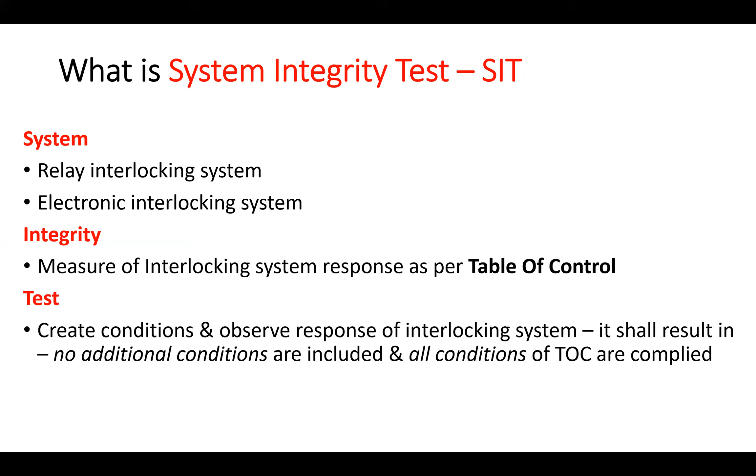Test: conditions are created and the response of the interlocking system is observed. And naturally, it is supposed to result in no additional conditions being included, what are not provided in table of control, because that reduces the flexibility sometimes, or maybe it is not advisable. And all conditions of table of control are complied, because the second one can lead to unsafe side situations and causing accidents.

So let us look at the interlocking principles. We all know from the basics that the track is divided into stations and block sections, and signals were required to give entry into the block section and into the station section. And further, because the braking distance of the train is more, a warning signal is required, what we call a distant signal behind the home. And to protect the points within the station, we require starter signals. So basically distant, home, starter, and advanced starter.

In bigger yards, we may have interstarter signals and inner homes, and more than one home signal, more than one starter signal also can be there. So signaling elements, when we look at it: point, signal, train detection devices, and level crossing gates. Route - can it be a signaling element? Maybe sometimes when we try to look at it as an element, we try to physically identify it. Route is not a physically identifiable single entity. That is why it can be an element or not an element, but we'll have a look at it. Mostly we will be dealing with the route in this session.

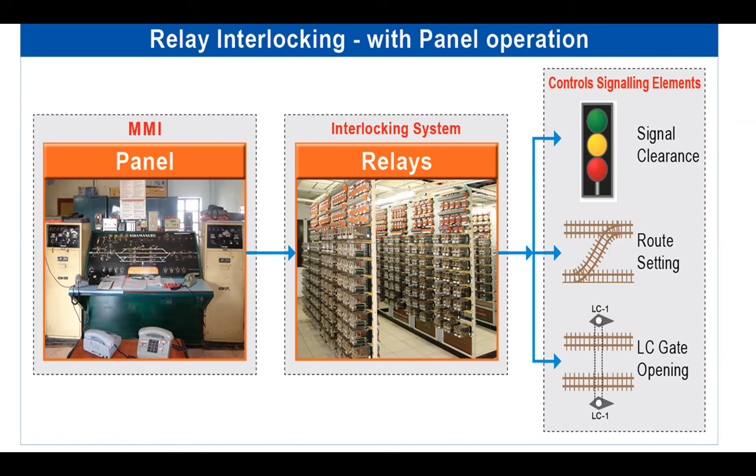So relay interlocking with panel operation, which was the very common thing on Indian Railways, looks like this. We have a man-machine interface, which is the station master's panel. He tries to alter the states of the signal, point - which is a route setting process - and level crossing gate. And in that process, he requests the change to the interlocking system. And the interlocking system, which is hardwired in the form of relays, evaluates the safety, and if it is safe, it allows the change of state and then gives the status back to the station master. This is the basic interlocking system's functionality.

Now components - if we look at how it happens, at the panel we have switches and LED indications for the statuses, and there is a cable connecting to the relays in the interlocking system. These cables are terminated at the panel termination rack, and then the relays require a power supply system of course. And then the signaling elements are connected through outdoor underground cables, through the cable termination rack. So the interlocking system interface can be at the panel termination rack for operations, and cable termination rack for the outdoor signaling elements.

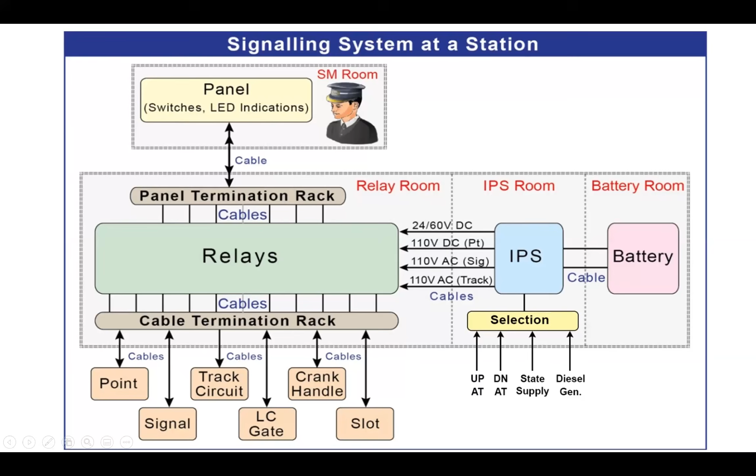Those people who understand interlocking and have some knowledge of signaling can easily understand this diagram. So the relays, which are supposed to deliver the interlocking, we can say there are three types: some input relays, output relays, and in between we have interlocking relays. And the signaling elements' status is given as input relays, like track circuit TPR, crank handle CHPR, slot from the other cabin.

other agency YR, then level crossing gate LCPR, point status NWKR, RWKR, signal lamp status - red lamp, yellow, green, route, double yellow. Similarly, at the panel interface, it takes the contacts from these relays to display the status of the signaling elements, including the route. And then the commands are given through the signal and point controlling relays. Other cancellation and miscellaneous relays are there and not mentioned here.

Interlocking relays are like route checking, route locking, route release, level crossing, and crank handle controlling and point controlling relays. And output relays are those which power the signaling element, like NWR and RWR. They power the point machine, which is operating the point. And signal lamps are lit through the contacts of HR, HHR, DR, UGR. Similarly, level crossing gate opening permission is given by LCYR. Crank handle releasing, taking out is given by crank handle YR. Similarly, permission to the other cabin is given through a relay YR.

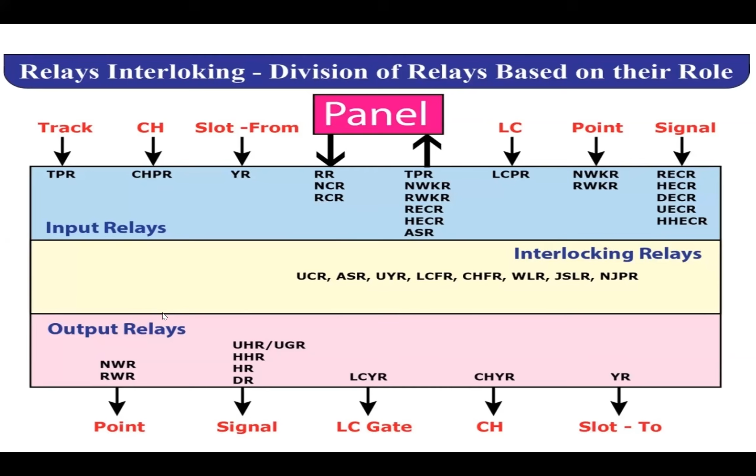This is followed on Southern and South Central, where the point machines are powered. Power is switched at the location box very near to the point machine. Most of Indian railways directly operate from the central place.

Similarly for signal also, we have a route - the RR relay, which is the first relay to ask for the clearance of the signal. Then route checking, route locking is done, and then we have the yellow lamp control relay. So the yellow lamp is lit through the 110 volt AC supply through the HR contact.

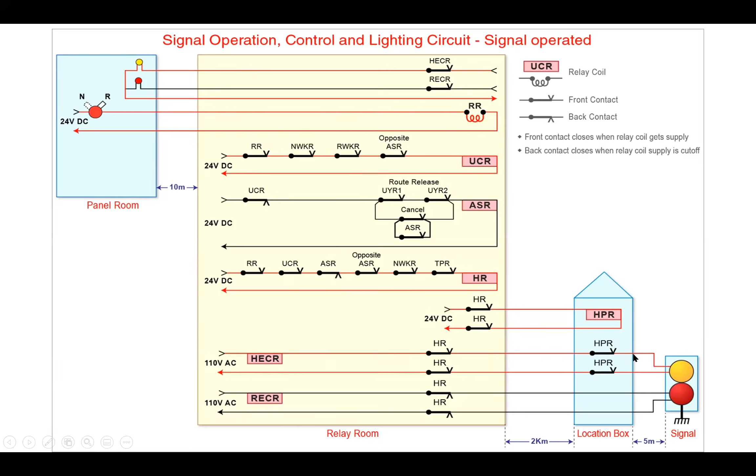Now let us look at the point. A point is a movable signaling element. So anything movable, if it is not properly moved, it can cause an accident - it is a big hazard. So the point becomes the central element in the interlocking system.

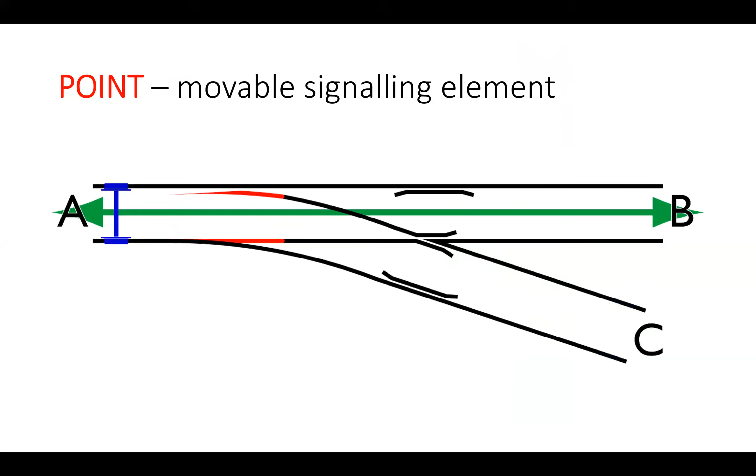Let us have a look at this station. It is a 5-road station with 3 passenger carrying lines and 2 goods lines. We can say this is a crossover, this is the trap point, and this is a single end point. In a crossover, the status of both end points together is considered for providing the status of the crossover for signaling purpose. If one end is okay and one end is not okay, it is treated as a failure.

For a single end point, isolation is not required. That is why a single end point is provided connecting both the goods lines. The outermost point in the yard is called the top point. From there, the counting starts for providing the signals, either advanced starter, the home signal, or a distant signal.

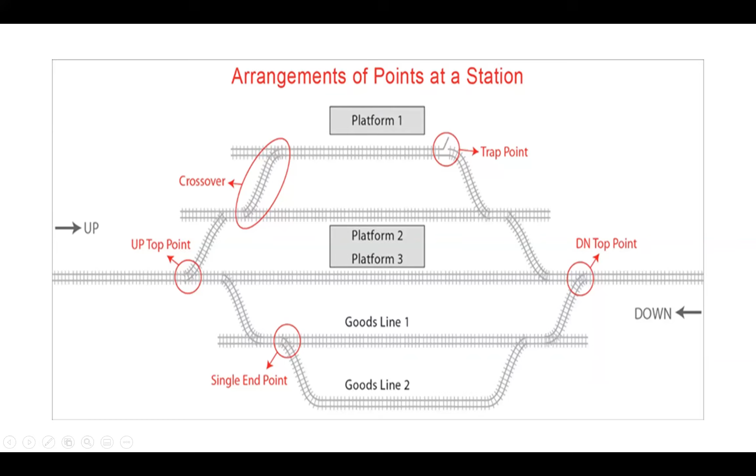Signals provide movement authority, and everybody knows red means stop. There are 2 types of signals: main signals, one based on operations - manual signals, and other types are automatic signals. Let us look at manual signals first.

The stop signal is the main signal we are talking about, not shunt and other auxiliary signals. Red means stop, yellow means be prepared to stop at the next signal. Double yellow means the next signal is already cleared, but you have to pass that signal at a restricted speed. Normally it is provided for distant signals, but where combinations of signals arise, any signal can have 2 yellow lamps. Of course loop line starters will not have this. Green means proceed at full speed.

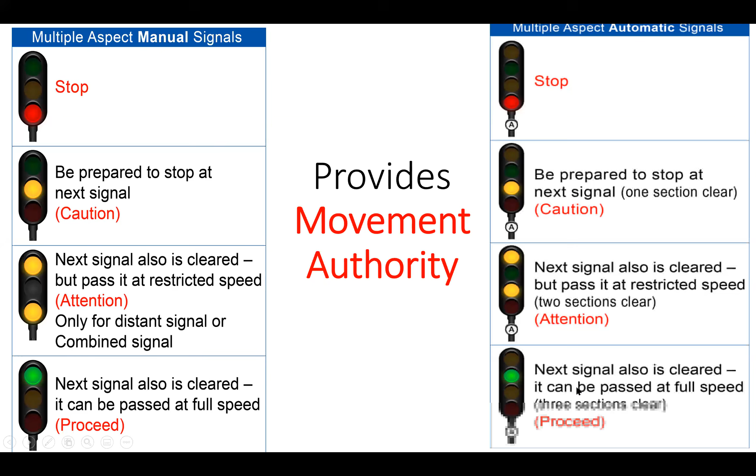Coming to automatic signaling, it's a very clear-cut thing - each aspect says how many sections are clear. This presumption is if the inter-signal distance is more than the braking distance. If it is less than that, the aspect is repeated. So yellow means 1 section is clear, double yellow means 2 sections are clear, green means 3 or more. It is something like this in automatic signaling.

So if there is a train here, the train is protected by the red lamp of this signal, and then we can see yellow, double yellow and green. Further signals behind the green are also going to have green.

A typical 2-road station where manually operated signals are provided on the single line - you can see the distant signal, home signal, and then the opposite advanced starter signal. The track is divided into sections for monitoring purposes.

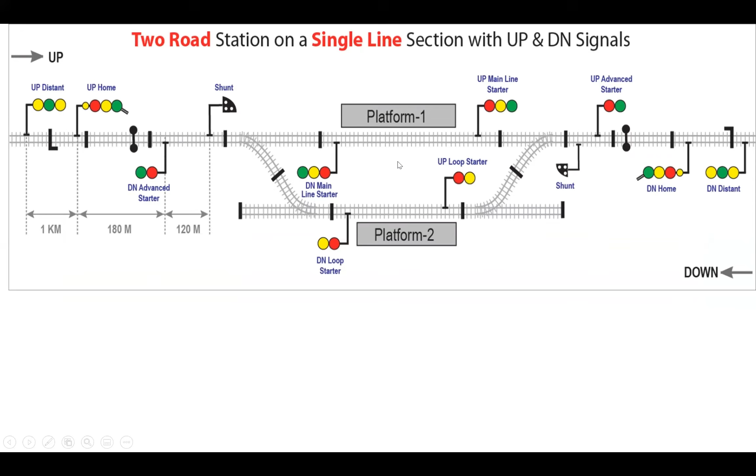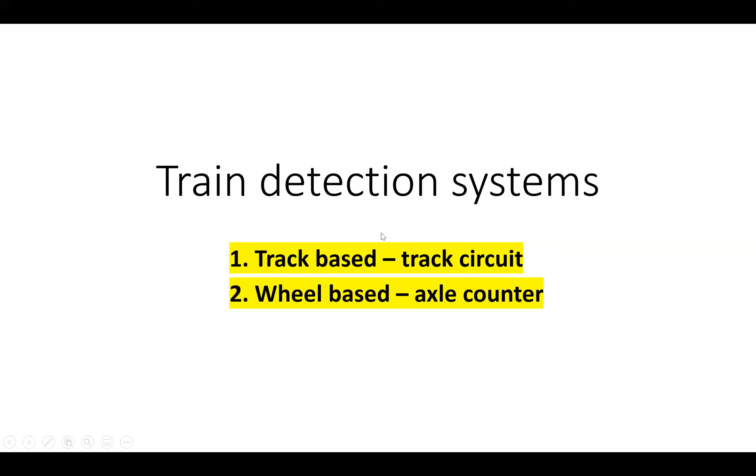Train detection systems - there are 2 types as we know. One is track-based, that is track circuit, powering up the rails with power supply and then detecting it on the other end. This is the DC track circuit, simple. The other one is wheel-based.

The wheel based system doesn't mean the wheel is detected directly - it's through the interference it causes to the magnetic flux of the sensors fixed to the rails. We have two types: analog axle counter and digital axle counter. Mostly nowadays, digital axle counters are being used.

For interlocking purposes, the complexity of train detection doesn't really matter, because we use only one relay ultimately to see whether a section is clear or not. Whether it is a DC track circuit, AFTC, or axle counter - digital or analog - it doesn't matter.

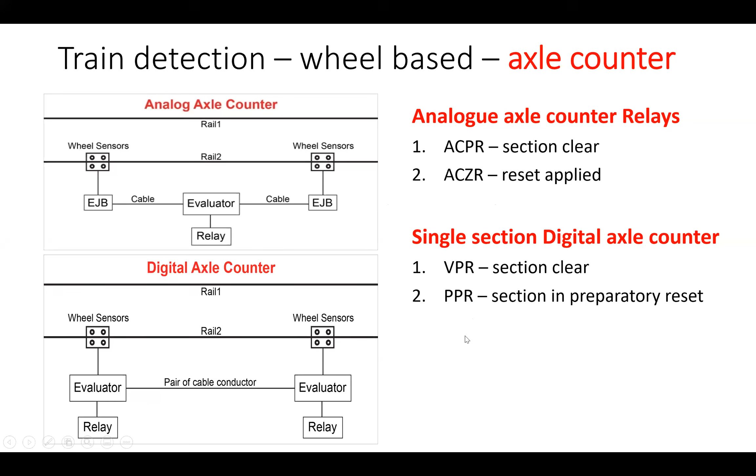So when the gate is closed, a key comes out, and that key, when it is inserted into an EKT, gets locked and it picks up a relay. That particular relay, LXR, is repeated to the station, and LXCR. This LXCR is used for the interlocking purpose.

After the train passes the level crossing gate, the station master operates the gate control switch. If the gate is free, a relay LXYR operates, and this LXYR relay is repeated to the station and to the level crossing gate. And at the level crossing gate, another relay picks up, which covers the coil to release the key to open the gate.

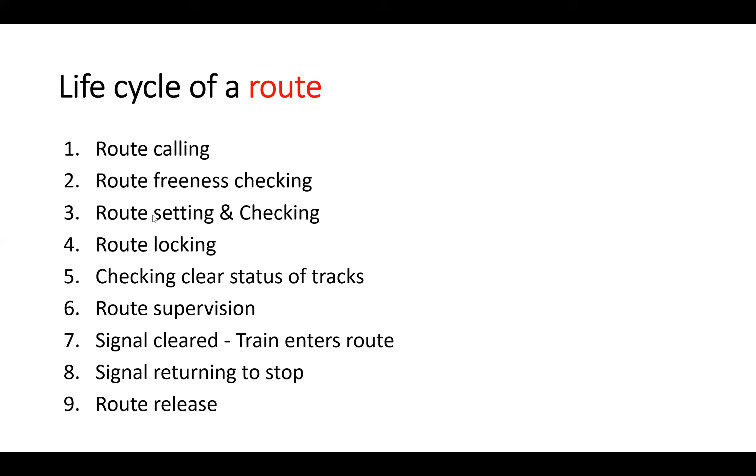Then the next one is signal is cleared, train enters the route, and then signal returns to stop, because as the train enters the section, and then when the train reaches the destination track, the route is released. These are the 8-9 activities that takes place during the life cycle of a route.

Route locking can be reversible and irreversible. Both stages are there. So what is reversible route locking and what is irreversible route locking? In reversible route locking, the signal, when normalized, route gets released. In irreversible, it won't. That also we will see a little later.

Why are we locking the route? There are two basic reasons. So, locking between the conflicting routes, that is, it won't allow the conflicting route to be used for sending a second train. That's why we lock the routes.

The other one is, until the movement is completed, the signaling elements, level crossing gates, movable bridges if there are any, or the points, they are kept intact. Otherwise, there can be danger at the level crossing gate to the road users, or the train itself may derail over the points if the point is disturbed when the train is running.

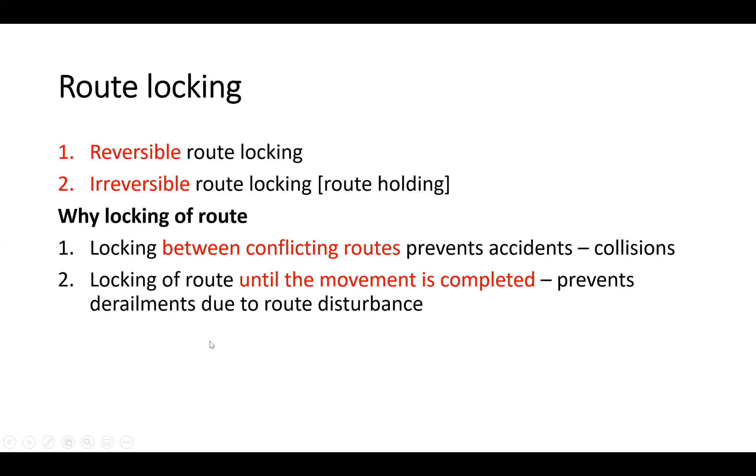Irreversible locking happens after signal opening, signal clearance. Actually this is what is happening in our case. So first default position is no route is locked. Then first stage is route calling and checking. Second stage is commanding of the elements, that is points. Third one is signal opening with reversible locking. That means signal gets cleared, and if the signal switch is normalized, the locking gets unlocked.

Next stage is irreversible locking, which we call approach locking. Then train enters the section, then signal goes back to danger. Seventh one is train clears the route. Even partially also we can release the routes. Then the route release takes place.

So at any stage, route calling stage, or commanding of element stage, or before signal opening, or signal reversible locking stage, we can go back to the default position of route not locked. You can see these three arrows. In all these three stages, we are permitted to release the route without making use of the route.

This is irreversible locking before signal opening. This happens in Siemens design. When once we clear the signal, and if we put back the signal, and when GSLR drops, it is not possible to again operate the signal. We have to again cancel it and then re-clear the signal. Maybe because the status of the buttons used normally in Siemens practice doesn't say anything about the operation. The operation is a momentary thing which gets recorded. That is why irreversible locking is provided before signal opening.

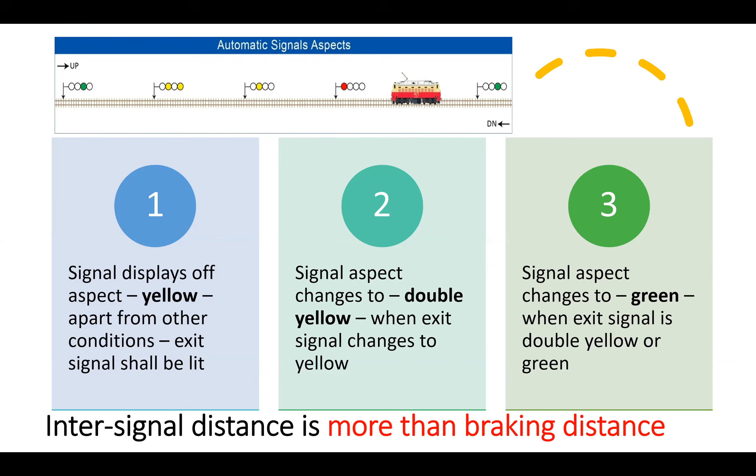A signal displays single yellow, apart from proving other conditions, when the exit signal is red. Exit signal shall have a light, otherwise the driver doesn't know where to stop. Signal aspect changes to double yellow when exit signal changes to yellow. Similarly, the same signal aspect changes to green when the exit signal is double yellow or green. This is the sequencing that happens.

If we apply this to standard manual signals, you can see the up advanced starter and up mainline starter number 2, up home signal and up distant signal. Let us observe how their aspects are controlled. The green aspect of the advanced starter controls the green aspect of the mainline starter. Similarly, the red aspect of the advanced starter controls the yellow aspect of the mainline starter. If the red lamp fuses, if that advanced starter is blank, the mainline starter signal cannot assume yellow aspect. This is red lamp protection. The same thing is applied for the home signal also.

The green lamp can be lit only when the mainline starter is green. Similarly, the yellow lamp can be lit only when the mainline starter is yellow or red, one of them, meaning the signal has to be lit. So when it is set to the route, that route lamp also is lit, that is for the loop line reception.

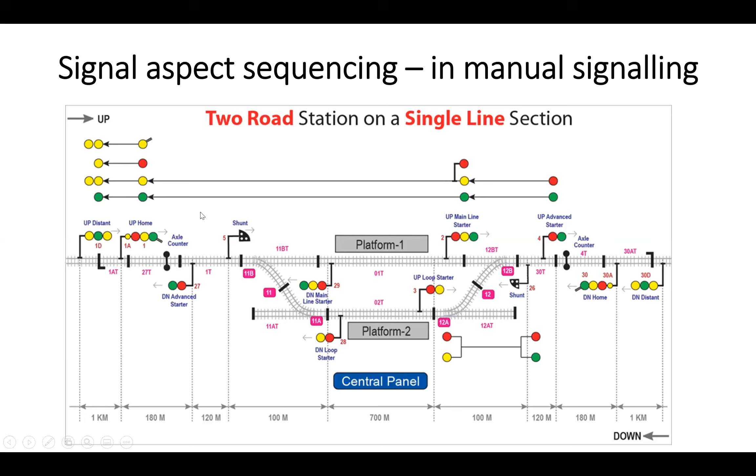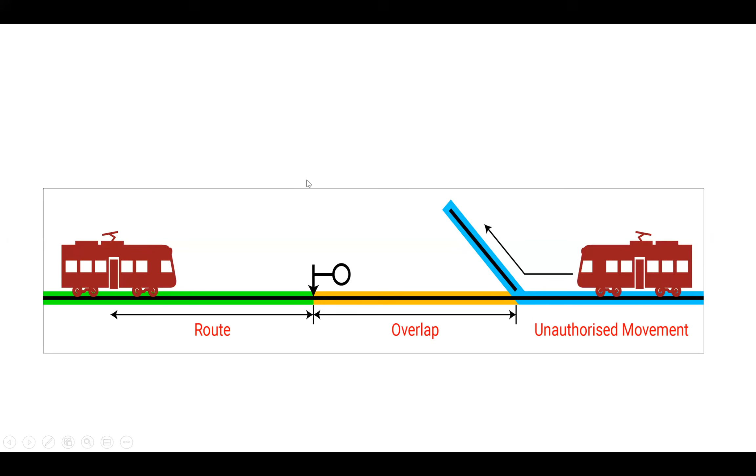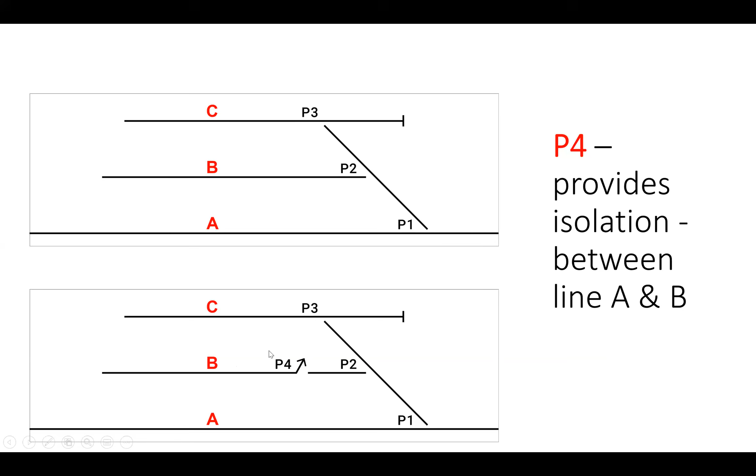So we have to be very careful while looking at the track plan, the engineering scale plan, before designing the signaling system.

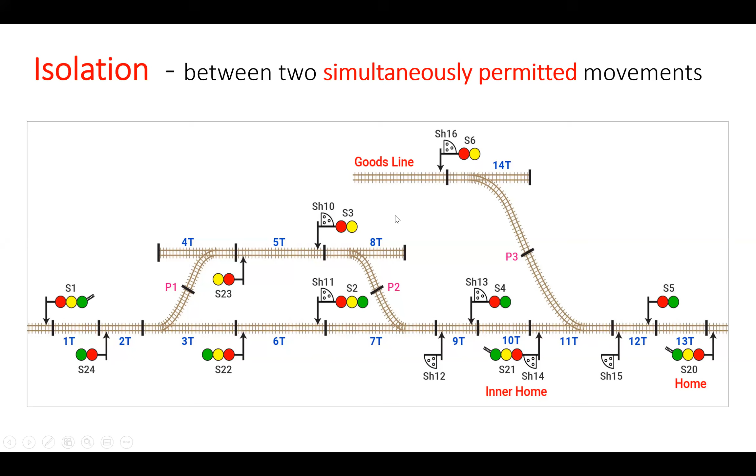Now let us look at how the locking between the two routes gets affected because of isolation issues. A mainline train is expected to be received onto the mainline as a stopping train, so the overlap is extended up to S4.

Another train coming from the other direction is expected to be received on the goods lines. Can these be permitted, like in the previous example we showed? Basically they are not permitted, because if one of the trains passes the signal at danger - meaning train 1 only, not train 2 - then it is likely to cause collision at point number 2 or point number 3. That is why it is not permitted. Here we have to look at both our main signal movements.

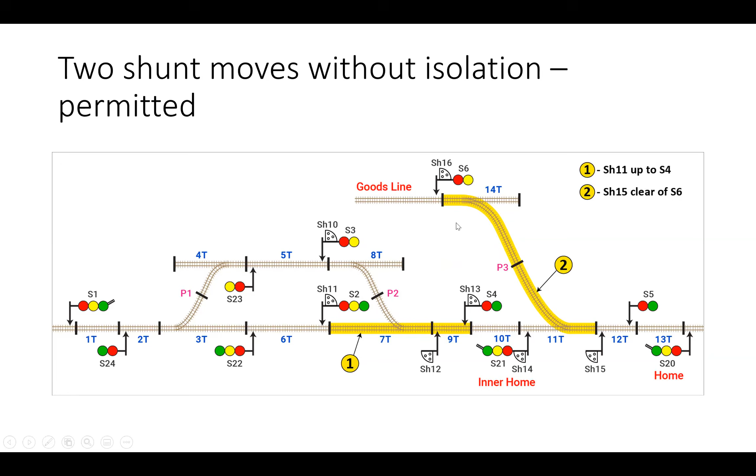Here, shunt 11 is to be clear of shunt 12, that means up to shunt 13. Similarly, shunt 15 has to be cleared towards the goods line, clear of S6. These two are permitted actually, because basically the logic considers two things: one, shunt movements are normally not supposed to have passenger-carrying coaches; two, they are controlled slow movements. That is why overlaps are not catered for shunt movements, but isolation is not considered.

Now here you can see the home signal is cleared for reception at the goods line and the other one is a shunt movement. This is not permitted, because the shunt movement, even though it is slow, is considered indisciplined - in the sense that the train may not have full brake power, so there can be controlling issues. If it passes the signal at danger, it is going to hit the main train. That's why it is not permitted.

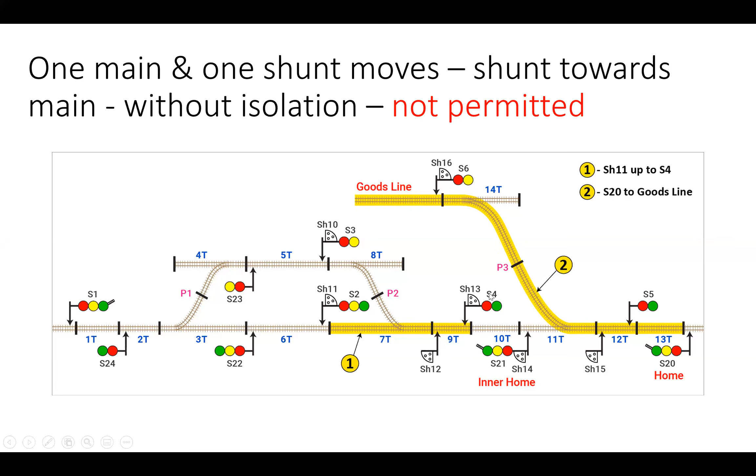Similarly, the other case: when the main train is being received onto the home signal, onto the main line, a shunting movement can take place here, because the main train is expected mostly to stop clear of the overlap. Even in case it passes, the collision is going to be with the shunting train. Normally, these are the practices followed.

Route release is a very dangerous thing because premature release can cause accidents. The purpose of route release is that normally the direction of movement has to be proved, and the clearance of the tracks, both these are to be proved.

For this purpose, a route shall have at least a minimum of 2 track circuits, other than the berthing track, normally. So if AT and BT are there, then clearance can easily be ascertained that the train has traveled from AT to BT and then cleared BT also.

There is another way of detecting this. If we have a rail contact, like the wheel sensor of the axle counter, it also determines the direction because it has 2 sensors.

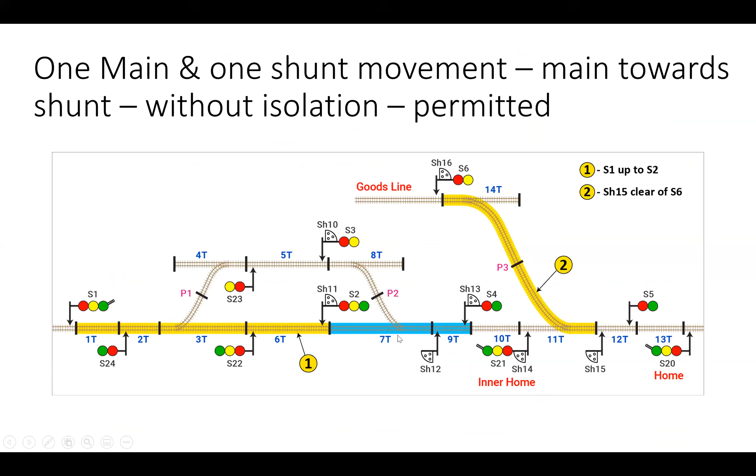But in some cases we may have just only one track circuit. Let us see this particular one: Shunt 11 to clear off Shunt 12, there is only one track circuit. We cannot prove from which direction to which direction the train has moved. So here, after the clearance of the track circuit, a time delay is given, normally 2 minutes, after which the route gets released. So route release, which is a very important feature, is taken care of in this way.

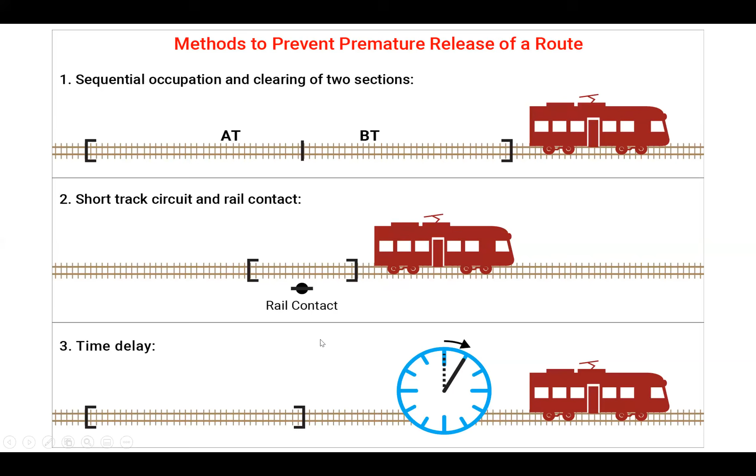So just now we have seen how route locking is taken care of. The approach of the route has 2 cases, and then when it enters into the route holding.

Design documents - we have a lot of design documents, but basically what are required for us essentially are given here: signaling and interlocking plan, table of control, and signaling circuit diagrams. I'm not going to cover SIP much, only TOC and partially signaling circuit diagrams I will cover.

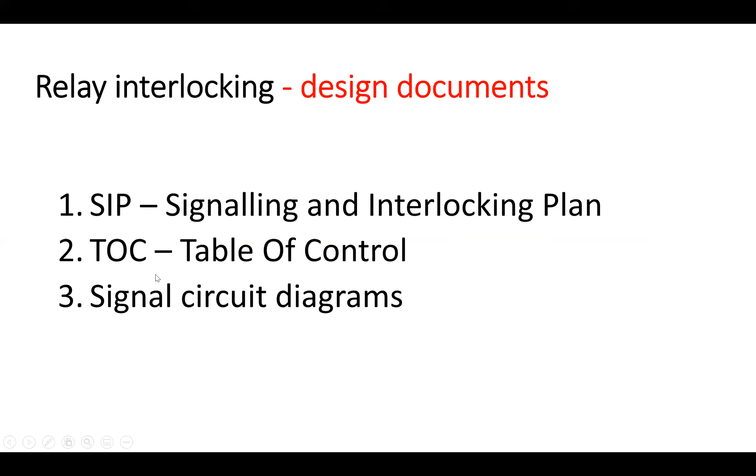Table of control - this is the heart of the interlocking system. This prescribes how a train movement can be controlled by the interlocking system: what conditions are to be proved, when the route can be released, when the route has to be locked, which routes are to be locked, and all those things regarding when the route has to be released.

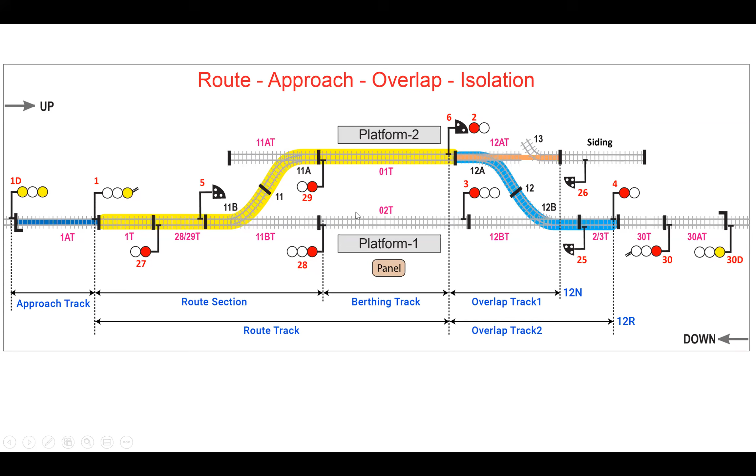For the purpose of explaining the table of control, different railways have different practices of making a table of control. Recently, Indian Railways formed a committee to finalize standardization of circuit design. As part of this, the table of control recommended by this committee, which is supposed to be accepted by all Indian Railways, is now explained.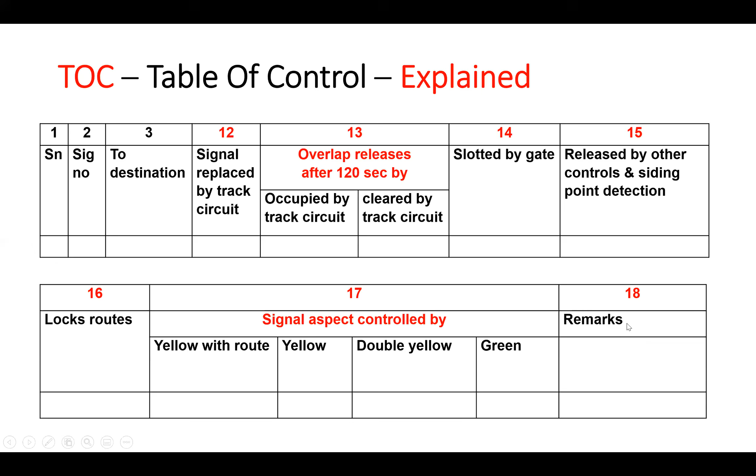Let us have a look at this. You need not look at too much of the details of the yard. It is a typical 4-road station on a double line section with a common loop on the down below this line. We are going to fill up the table of control for a route for reception on the common loop with the overlap set to the right line, not onto the overrun line.

So signal S01, destination is S07. Signal button is S01 and route button is 0401. There are two buttons, 04-2, 04-1. 04-1 is for setting overlap up to the advanced starter. 04-2 is straight. So in the route points required, there are only 2 points, 101 and 103 in reverse.

Track circuits required, you can see 01T. There are 2 track circuits here for this point, another 2 track circuits here, and then 2 berthing track circuits - 01T, 101 ATBT, 103 ATBT, 04 ATBT.

In the overlap, it starts from S07 and ends at S09 advanced starter. We have 2 points, 106 in reverse and 102 also in reverse. Track circuits also we have 5 track circuits here, 2 point track circuits for each point and the 03/05/07T. So this fills up the conditions of the overlap.

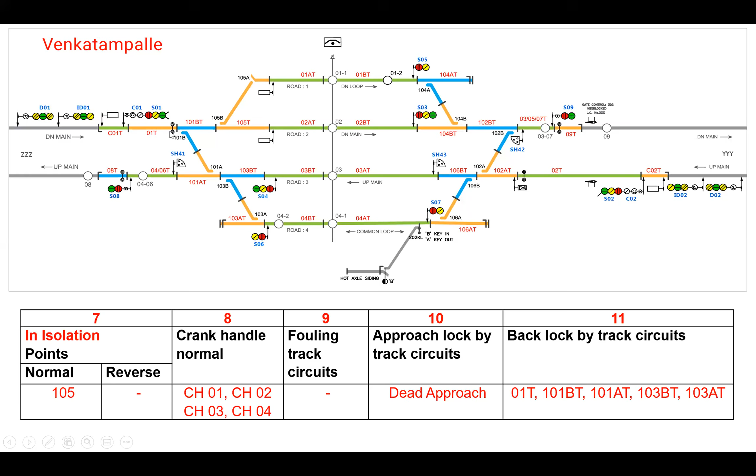Other than the berthing tracks, you can see 103AT, 103BT, 101AT, 101BT, and 01T, all the 5 track circuits. Signal replaced by track circuit 01T, this is the one.

There is no slotting available. And released by other controls is nothing here.

Locking of the routes - now here, as we have previously said, this locking of the routes, if we try to give all conflicting routes, then tens of them will be there. As we have seen, only those routes which directly collide, that means the conditions of the points are the same. For example, we have chosen this particular route. On the same home signal as 01, we have C01, calling on signal. It also pertains to the same route, except for the track circuits, it proves the points in the same way. So both cannot be cleared at a time, so they lock.

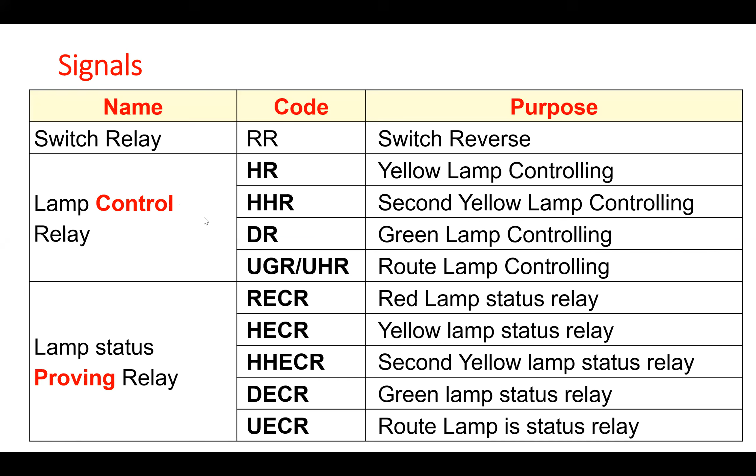The relay, I will explain a little later, but I presume we all know what a relay is. The types of relays we normally have by names for signals: we have switch relays, lamp control relays, and lamp status proving relays - ECRs, RECR, HECR, HR, HHR. Similarly for the point, we have switch relay, locking relays, control relay, point operation control relay which is power to the point machine, NWR, RWR, and then detection relays. Internally, more relays may be there like NWS or things like that.

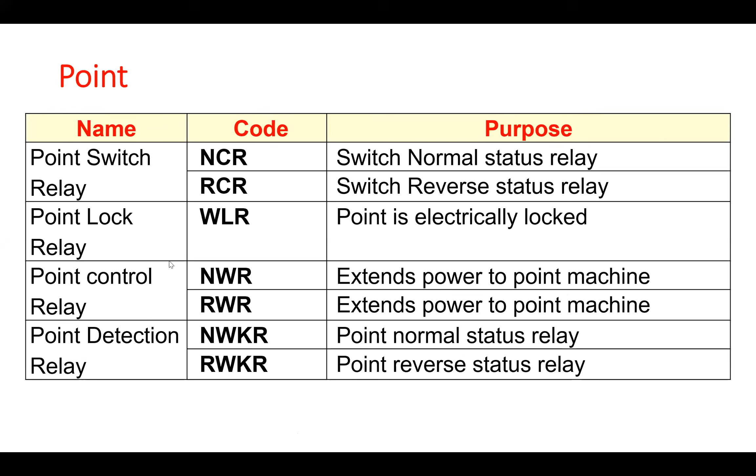Then route - route is related to the number of points and tracks. For selecting a route, you require a button, that is the button relay, and then route checking relay, route locking relays, and route release relays. So these are all the relays available.

About crank handle, and for LC gates also, these relays hold good. Crank handle in - that is not removed from the station master or whatever at the location - and crank handle switch relay for removal, with permission given by the station master. Crank handle locked, crank handle free, and crank handle release relay, that is permission for releasing.

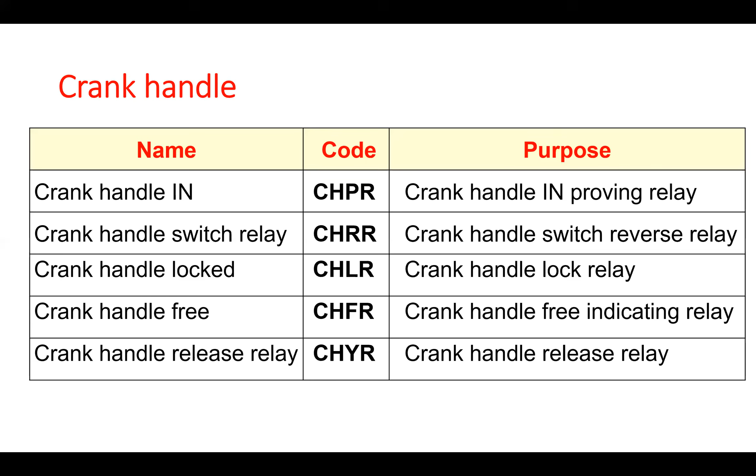So, the circuit - how it operates. Just to have a visual of this, I have taken a switch type operation because it is easy to explain and it is easy to understand the principles.

Here we have the signal switch S1 on the top, and in the leftmost corner and rightmost corner, we have the signal which is supposed to be changed from red to yellow. It's a two-aspect signal.

And these are all the relays involved: switch relay, route checking relay, route locking relay. I have shown just one track relay, but there can be a number of track relays in the route. And then the final relay, lamp controlling the HR. There can be more relays. I have just taken this to explain the principle of how the wiring is done.

You can see 24 volt DC supply is landing in one of the contacts, one end of the contacts of the RR. The other end is still open. When it gets closed, power supply of 24 volts gets extended to the next relay.

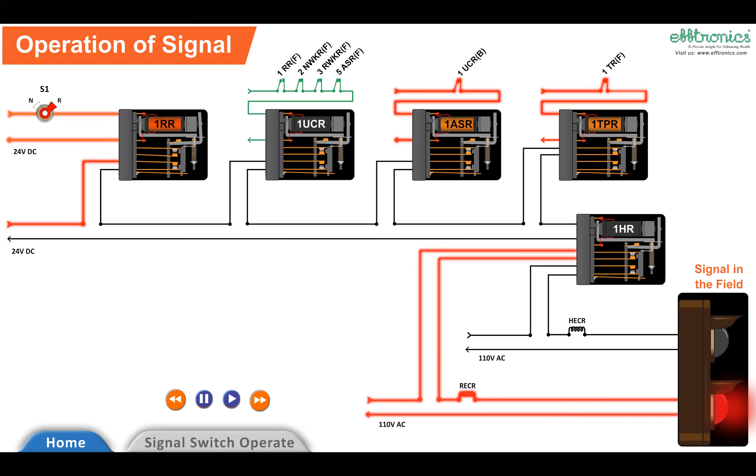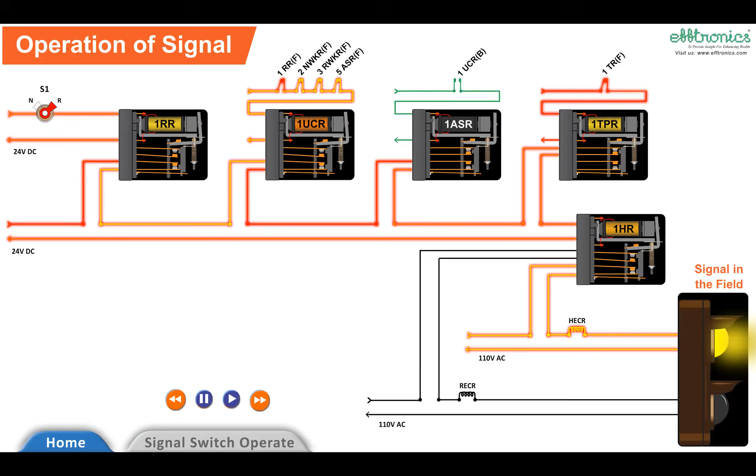Now, the route checking circuit looks like this. Let us say this is the route checking relay, UCR. What conditions are proved? Number one, switch is reversed. Number two, the opposite directly conflicting route is not locked, it is free. Then some points are required in normal, some points are required in reverse, and their crank handles are in. That picks up the UCR, the route checking relay.

How is the route locking and release circuit? Because locking and release is done by the single relay, ASR. We can see the conditions. First, let us look at the route release portion. Instead of talking about locking, if we explain route release, it is easier to understand. Let us say the ASR is the relay which is in picked up condition when the route is free, and it drops when the route is locked.

Now, the route is in locked condition, train has arrived and cleared all the route track circuits. UYR, these are the relays which pick up because of the sequential occupation and clearance of the track circuits. All the track circuits in the route, except the berthing track or destination track, are clear, and all the signals, that is signal aspect as well as controls, are normal.

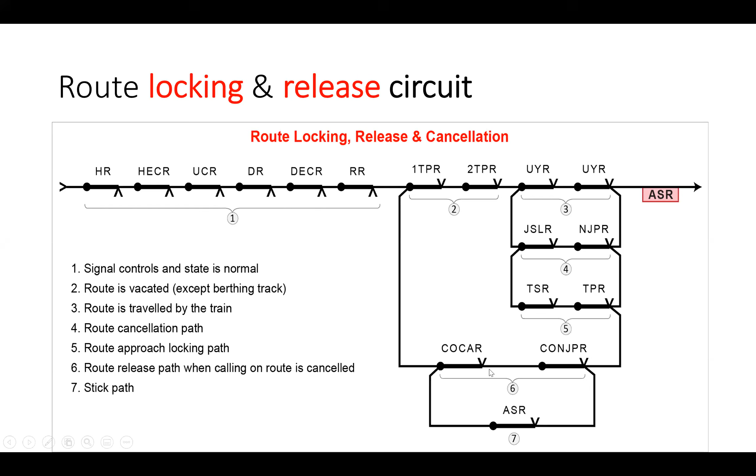This is if you presume how these route release relays operate. Let us presume there is a route with 1 TPR, 2 TPR, and 3 TPR. 3 TPR is the last one which gets occupied. These are the conditions, how they are proved.

These conditions are to say that the route is locked. That means the route for which the release has to be applied has actually been locked. Otherwise, unnecessarily UYRs will be operating. Number two, the signal has assumed its on aspect. And then you can see 1 TPR down, 2 TPR up, UYR operates. You can see when 1 TPR picks up as the train moves, 2 TPR down and 3 TPR up. This is another condition. So this is the way it is.

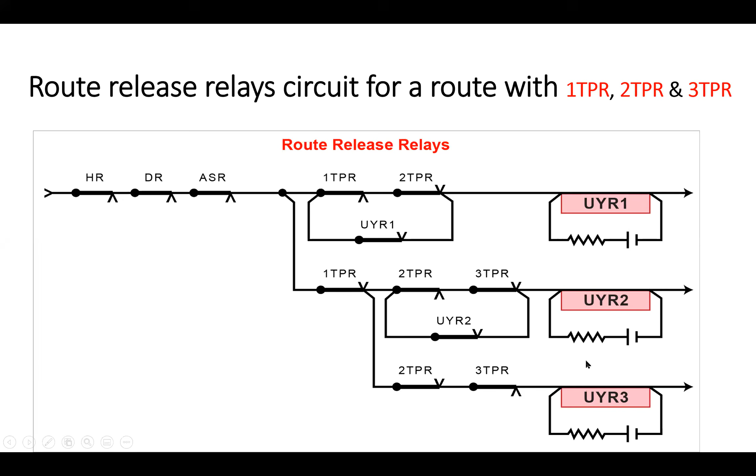Now, what are the design, wiring, testing stages of relay interlocking? This one has to be looked at a little carefully. Let us have a look. Design we have already seen.

SIP is required, TOC is required, circuit design is required. Then there are indoor installation activities, wiring of relays and panel as per the circuit design. Then testing of the wiring.

We have seen how the wires are drawn from RR to UCR to ASR. So each wire is tested, and then a test plan has to be prepared. What is this test plan? How to test the interlocking system? We will come to it a little later. Test plan has to be prepared.

Then test panel dummy loads, because we have not yet connected the system to the signaling elements. We have to test the interlocking before doing that. Then corrections to wiring and circuit design after testing.

First, we have to do the test. Test result says that yes, there is something wrong here and there. Then two types of problems can be there: wiring could have been drawn wrongly, and circuit design also there might be some problem.

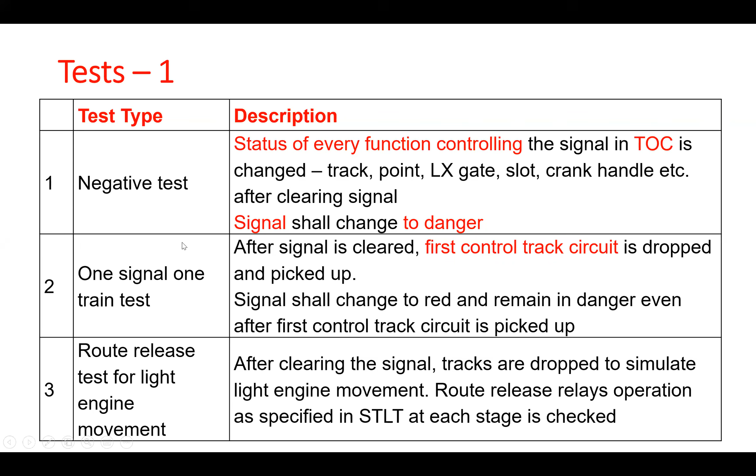How this can be conducted? Let us see. Now we have cleared the signal. So all these TPR, WKR, all these things, and the HR relay got operated and yellow lamp is lit. 15 TPR is the first track circuit. Now 15 TPR picked up, dropped, so TPR and TSR also dropped. Because of this, even after closing of 15 TPR, you can say picked up, still the signal remained red because TSR relay has not operated.

Now, let us go to the other signal elements. 10 is one of the points in the route or overlap, wherever it is. Now I disturbed it actually - my NWKR is up, now I disturbed it. Now signal has to go back to danger. Again I restored it back, it shall come back. This is the negative test.

Similarly, level crossing gate - I have created open condition, now again I closed it, again it came back. Similarly, one of the crank handles are removed, again inserted.

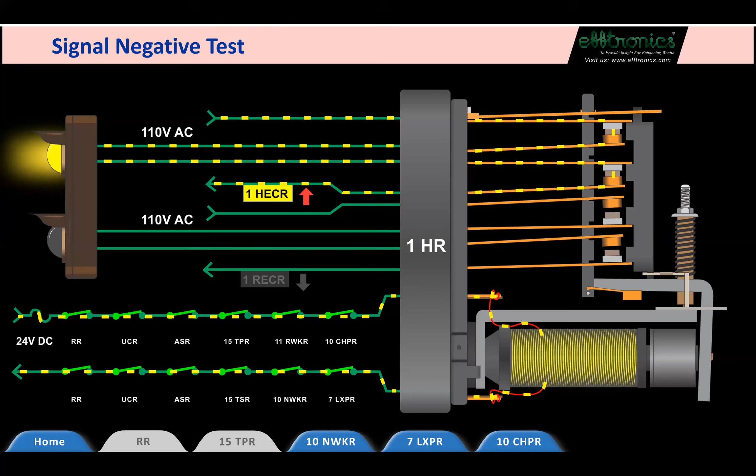Route release test for long train movement. Here, if there are 10 track circuits in the route, the 10th one is the last one. 1, 2, 3, 4, all 10 are dropped, and then one by one, from 1 to 9, they are picked up.

Route should release. Route holding test - so here, what holds the route? That is a track circuit actually, an occupied track circuit. All route releasing conditions are fulfilled except the picking up of route holding track. Then the route shall be in the locked condition.

Let us say in the previous case, 10 track circuits are there. All the 10 are down and 1, 2, 3, 4, all up to 9 have picked up. And before the 9th one picked up, let us say the second track is dropped. Again, after picking up, the route shall not be released. That's how route holding test is done.

Similarly, approach locking test - when the approach track is occupied, when the signal is cleared and then normalized, then it shall not be possible to release the route unless cancellation is applied with a delay. Red lamp protection.

Clear the signal, drop the exit signal red lamp proving relay. Exit signal is, for example, for home signal you have cleared. For the loop line starter, red lamp ECR is dropped. Then home signal shall go back to danger. Signal lamp cascading means that within the same signal, a higher aspect signal supply is cut off, so the lower one has to light.

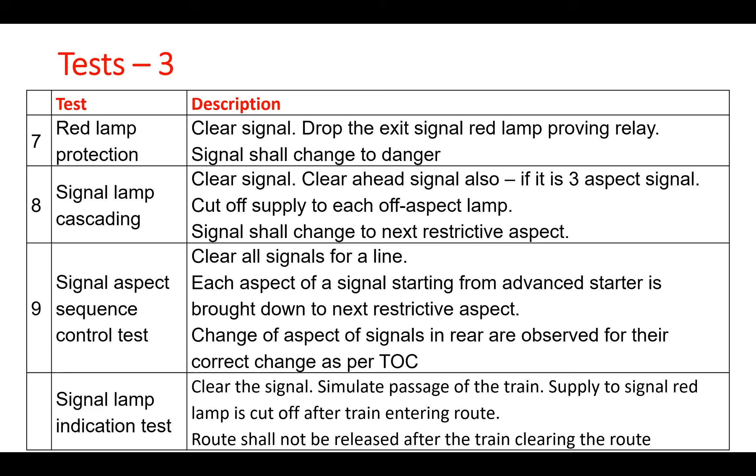Signal aspect sequence control test. Clear all the signals - for the main line, home signal, main line starter, advanced starter, all 3 - so all 4 signals are displaying green. Now cut off the supply to the green lamp of the advanced starter. Observe how the main line starter behaves, home behaves, and distant behaves. Similarly, come back up to the home signal. This is the signal aspect sequence control test.

Track locking test for points. Track locking is done even when the point is not included in a route. That is, when unsignaled moves are done over points, it shall not be possible to operate the point when a train is on the point. So it is a simple case where tracks are dropped and an attempt is made to operate the point.

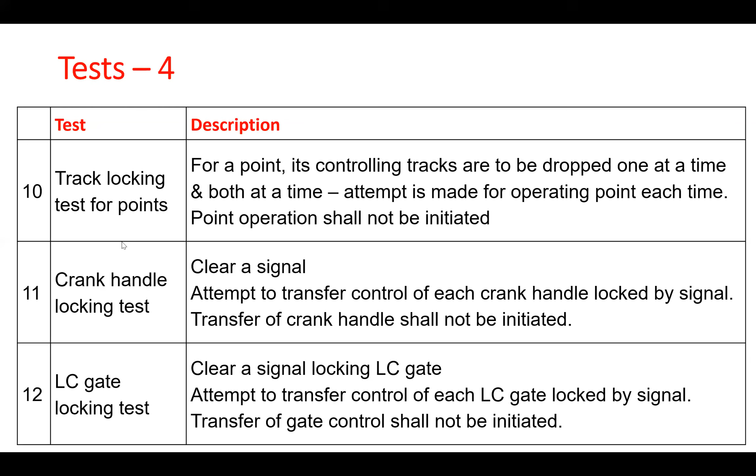Crank handle locking test: after the crank handle is interlocked with the signal, and after signal is cleared, attempt to transfer control for each track circuit, each crank handle - it shall not be possible. Similarly, LC gate locking test is like crank handle locking test.

Route locking test, that is point locking test: clear the signal and attempt to operate each point to be locked in the route as per the TOC. Point operation shall not be possible, the circuit shall not initiate. Similarly, SM key test, key lock test: SM key locks certain operations - all those signaling elements, try to operate and then it shall not be possible.

Point operation through route. In route setting type panels, points are thrown by the route initiation, not by individual point operation. How to know whether that circuit is functioning or not? For example, if some 4 points are required, all in normal position for a route, then set all 4 points to reverse manually and initiate the route. All 4 points shall be possible to operate them to normal automatically by the route.

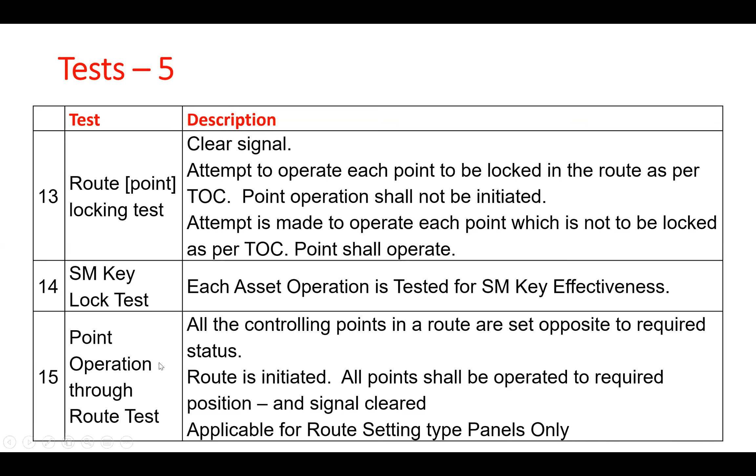Next test, route checking test. Route checking test is the most important thing, and it cannot be done manually. Let us say a signal is cleared for a route like Vijayawada RRI. There are 100 points and 125 track circuits. In this route, some 7 points and 12 track circuits are used. How are we sure that other than these points and track circuits, nothing else is proved? It is very difficult to test manually, but it is possible to test through automatic testing - that I will explain a little later.

So how is the present testing done? Basically, 2 types of boards are prepared first to simulate the loads. The yard diagram is drawn, and for each track circuit, one 2-position switch is kept. In one position, the track relay drops, and in the other position, the track relay picks up. All this is intercepted at the cable termination rack. Normally, from the cable termination rack it is supposed to go to the loads - signaling elements, points, track circuits - but they are cut off, and then through dotted wires they are brought and wired to the switches for point normal, point reverse.

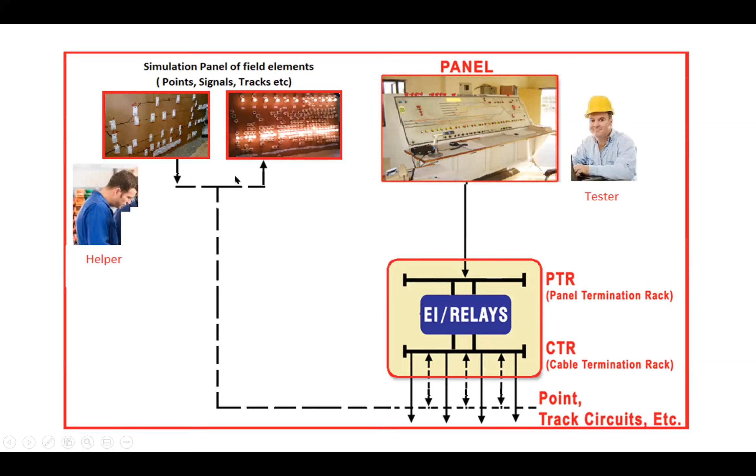What actions? Actions of both these people, the tester as well as the helper. What is the tester doing? Operating the signals, operating the points. What is the helper doing? Disturbing the status of the signaling element. When the point is normal, he is dropping the normal NWKR. When the track is clear, he is dropping it and again maybe picking it up. When the lamp is lit, he is extinguishing it by cutting the power supply. So both these acts are to be done automatically in the system integrity test.

So this hardware consists of a processor-based system, and at the end you have a miniature relay with contacts which does these operations. I will show you a little later.

Software development - what does the software do? It has to generate the test plan. Once we enter the table of control into this, it shall generate - let us say the table of control says that for so and so route, 10 points and 15 track circuits are there - so it has to generate 10 plus 15, 25 test cases automatically.

Then hardware control - the software has to do this because it has to operate these hardware potential-free contacts, that is disturbing the status of points or setting the points. Then comparison of the data - how it gets the data and all, we will see a little later. So, integration of the hardware and software.

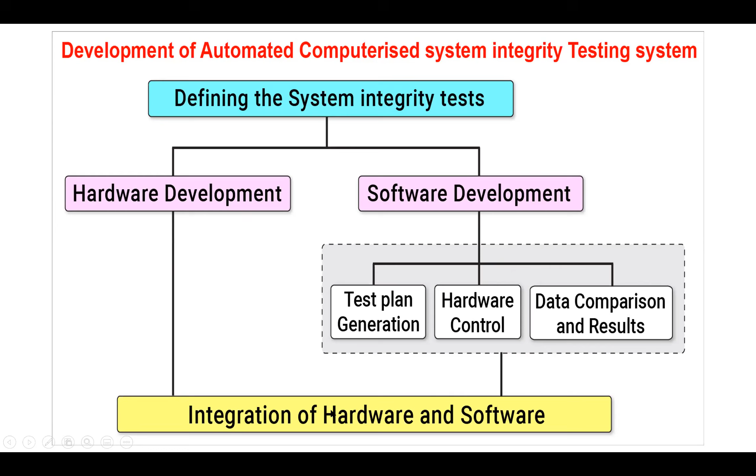One is to do the job of the assistant tester or helper. The other one is to do the job of the main tester - that is controlling the panel and changing the states of the points, track circuits and all. How can they be changed? Based on the instructions, based on the software here.

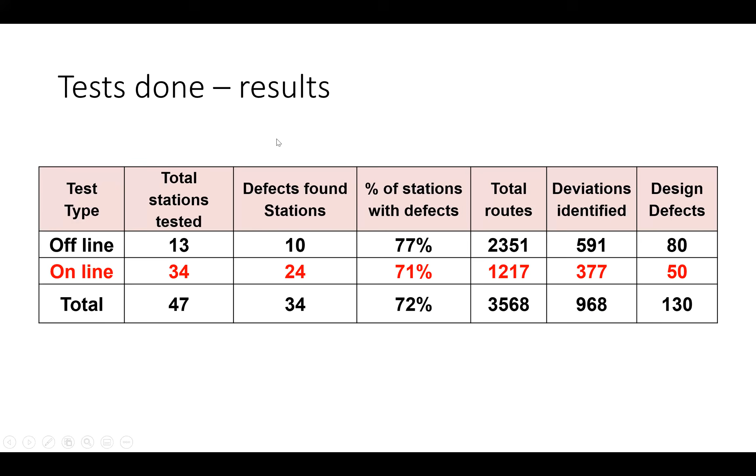So how are the instructions made for carrying out the test? Negative test - let's say clear the signal, meaning this is the logic we have seen, change the status of every function, track, point and so on controlling the signal. Instructions are prepared like this.

Clear the signal means operate the so and so signal to the so and so route. 2 miniature relays will be operated by this instruction. Then drop 9 LXPR. 9 LXPR is one of the conditions, for 2 seconds, and pick up. So signal HR drops and picks up again. Similarly, 7 NWKR, HR drops and picks up.

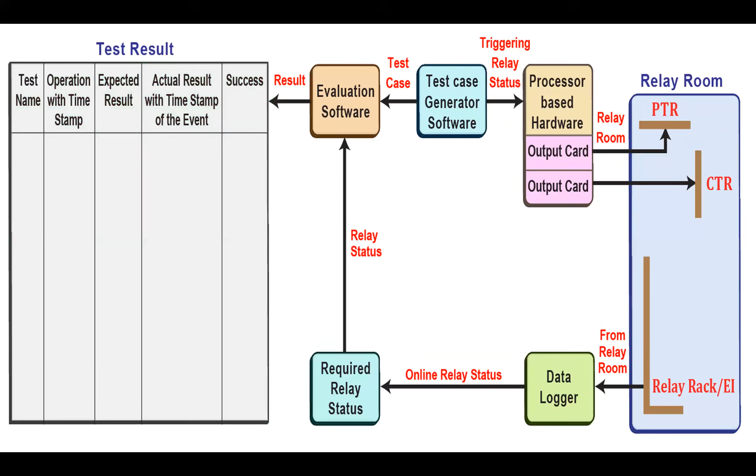All this information is taken through the data logger. You can see how it is collected from this. The instructions are passed by the hardware to the relays by both ways - one is by operation, by changing the status, and the status comes back through the data logger, through the software. So comparison takes place here.

So the instructions are made like this. Let's say Vijayawada RRI, there were 30 points and then 40 track circuits, total 70 elements for testing the negative test. How much time does it take manually? Each one calling out, observing, at least...

70 elements means at least half an hour it may take, or at least 20 minutes if done very fast. Now with this software, it can be done in 70 seconds, hardly less than 2 minutes. Because what it does - 7 NWKR is dropped and picked up, so HR drops and picks up. If it happens, that means 7 NWKR is proved in the circuit, 15 TPR, like that.

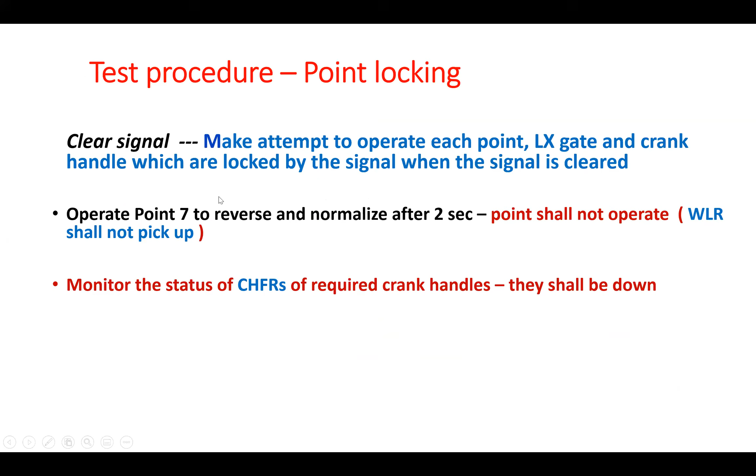Test procedure for point locking - for the point locking we are given here, an attempt is made to operate point number 7. Like this, the route holding - clear the signal - all route releasing conditions are fulfilled except for that one track, which is the route holding track. So clear signal to main line.

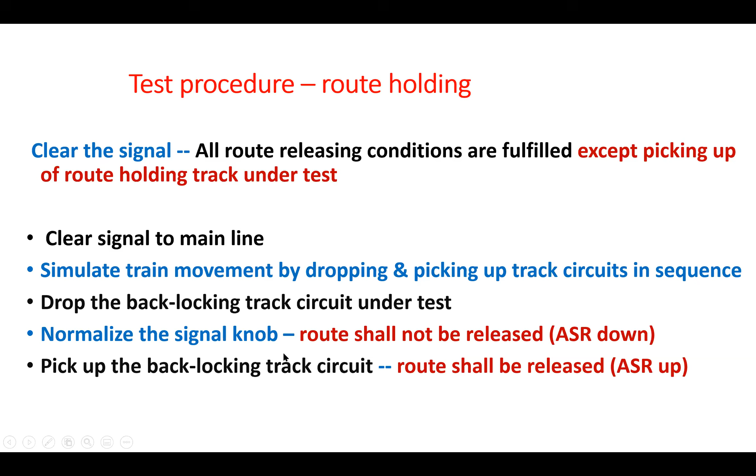Simulate train movement by dropping and picking up track circuits in sequence. Drop the back locking track circuit under test. Normalize the signal knob - before that, if you normalize the signal knob, the route gets released. The route shall not be released. Pick up the back lock track circuit, the route shall be released. This is the positive way of looking at it.

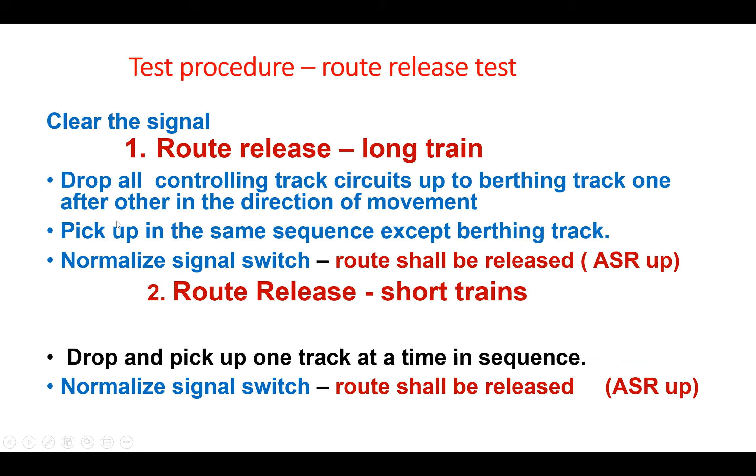Like this, approach locking is tested, then route release test is done. Similarly, the aspect sequence control test is done, point track locking test is done, dropping of each track circuit.

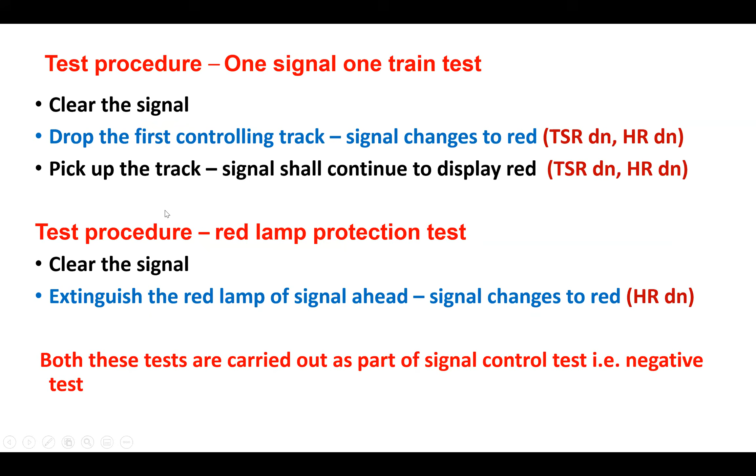Both the track circuit dropping also has to be done if there are 2 control circuits. One signal, one train, that is dropping of the first controlling track and observing TSR and HR, crank handle and level crossing gate locking, square sheet testing.

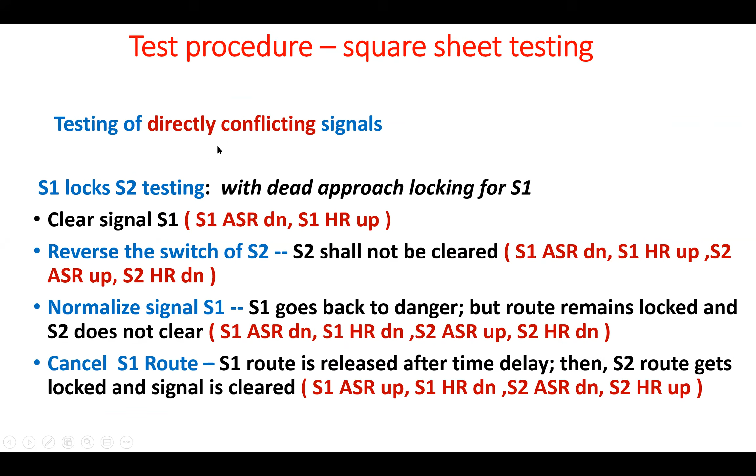All these tests can be done automatically through the software. I will share some test results.

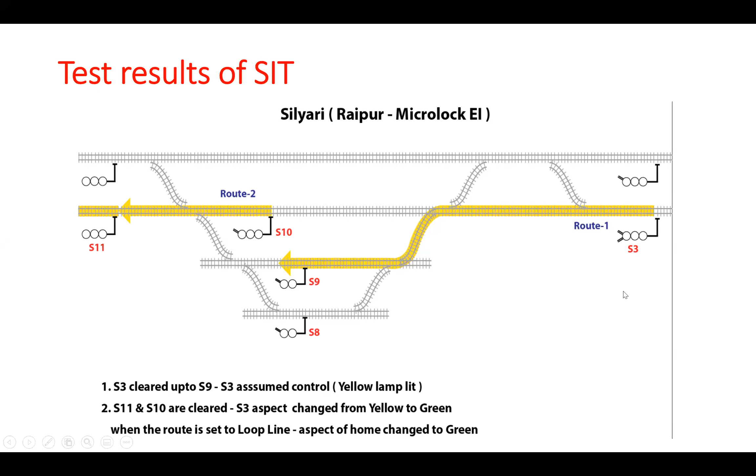When the simultaneous movement test is done, the tester tried to check whether the signal has gone back to danger or not. That is the mistake he made while doing the manual test - he did not observe that it has gone to green, which is much more dangerous.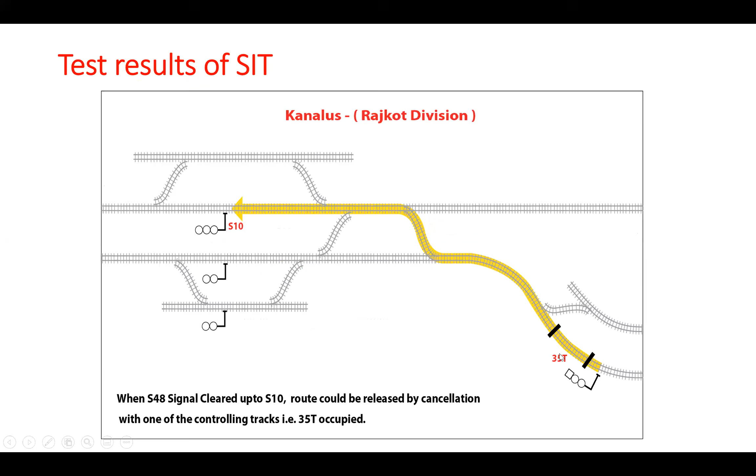Similarly, at Kanalus Station, Rajkot Division, track 35 is not used in the backlocking.

But why are all these mistakes happening? Because human testing, human behavior is not suitable for doing the things repeatedly. It causes fatigue, and that is why these mistakes have happened. These are all the many test results that are available. This can be looked at a little later also, and the PPT is available for you.

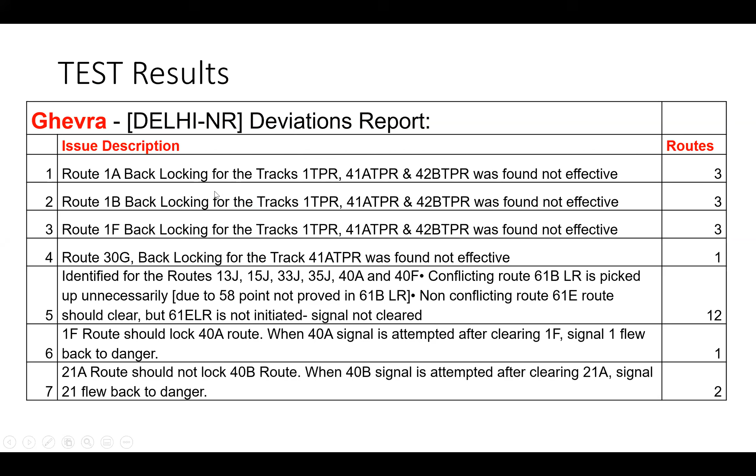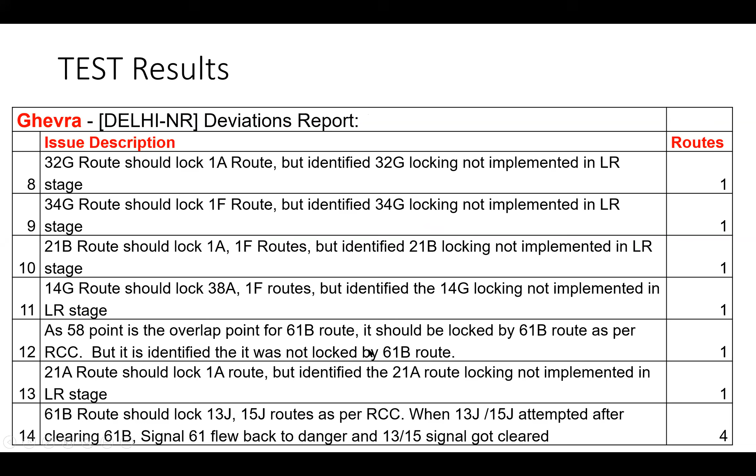The 58 point is the overlap point for route 61B, it should be locked by route 61B as per the RCC, but it is identified that it was not locked. So these are the type of mistakes.

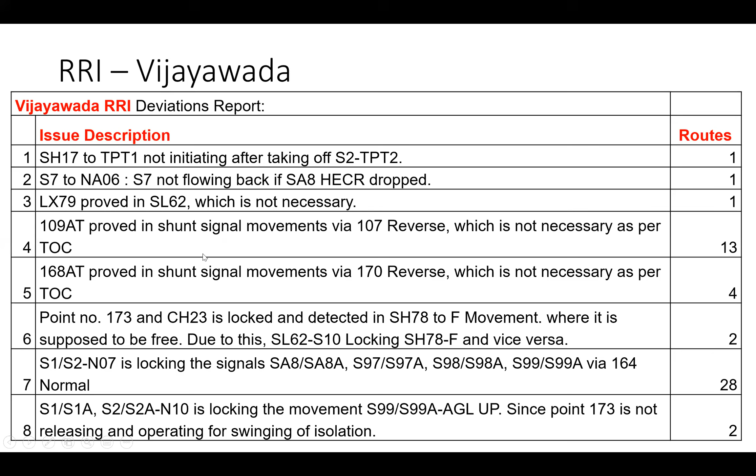Vijayawada RRI also, we have done this test. It took almost 3 months to complete this test, about 730 routes also, F cabin, G cabin. So if we look at the system integrity test, it happens something like this.

Now, what happens in case of VDU operated electronic interlocking? The panel will not be available, so how do we control clearing of the signal? Here comes the limitation. Because of that limitation, this is what we have done.

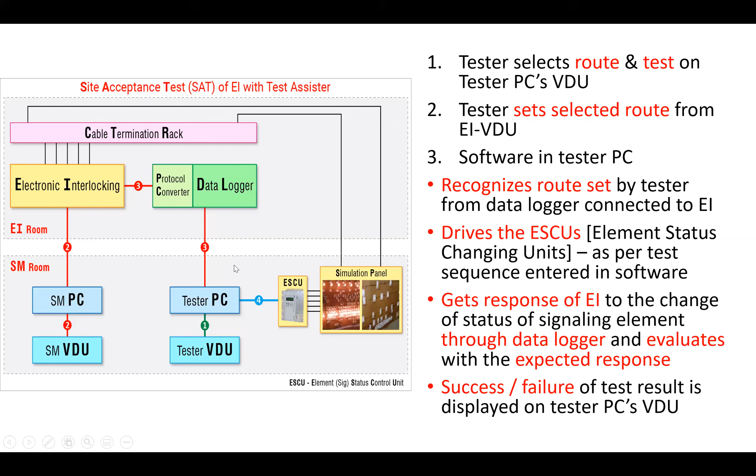I can show you the same thing here. Actually, this can be applied for distributed interlocking also - there is no difference at all. Only thing is these miniature relays are kept in the Gumtys. That's all.

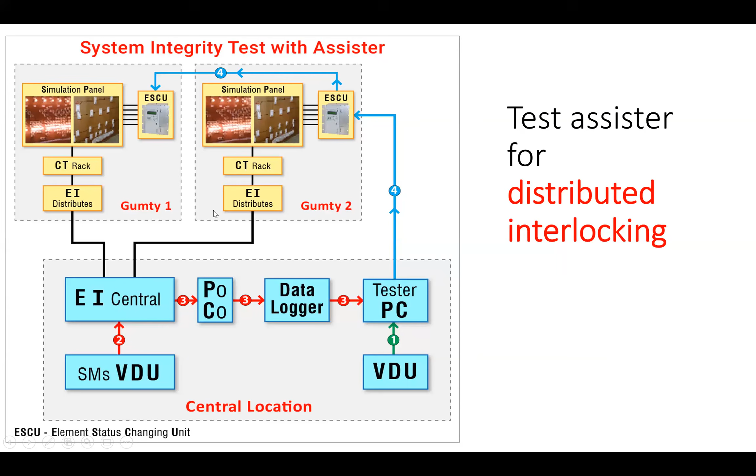This is what is done. Tester is available here. He has two PCs, tester PC and SM's PC. Now in the tester PC, he selects test number 1.

I am repeating what I told just before. He selects test number 1, that is route number 5, a negative test. Then he himself sets route number 5 through the SM's PC. This is done manually, actually. That is why we call it assister, not automatic tester. Then the route is set, data logger reads it and gives back. Tester PC now recognizes the tester has selected a particular route and he has set the same route.

Now this loop happens automatically, this red loop. It keeps on dropping and picking up each condition, then reads through the data logger and evaluates the test results.

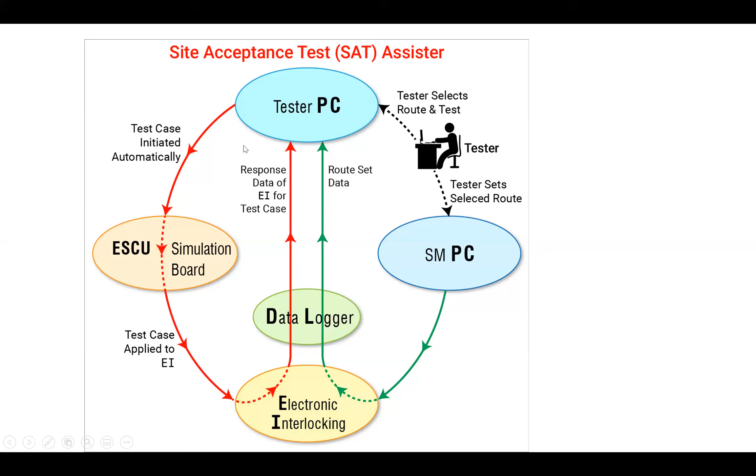Again, we can show the difference between the system integrity tester automatic and system integrity tester assister. Here is the manual thing available here. This loop is automatic, test conducted.

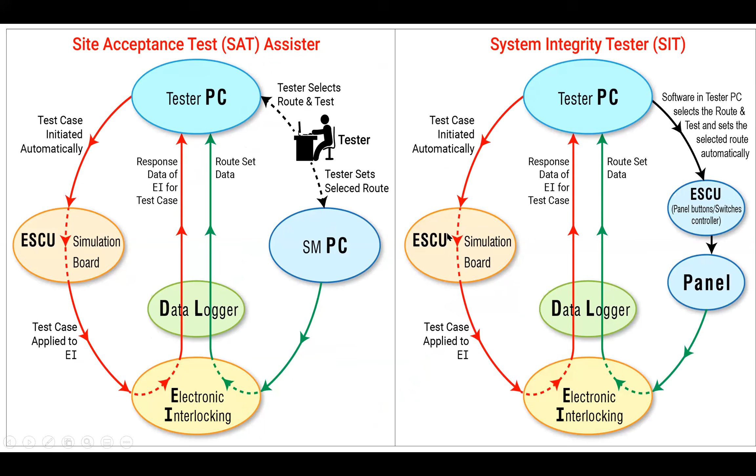Similarly, one signal, one train, all this. So EI VDU operation and tester PC VDU operation, these two are to be done manually. There is no need to change the statuses of the signaling elements. Like this, all the tests can be carried out.

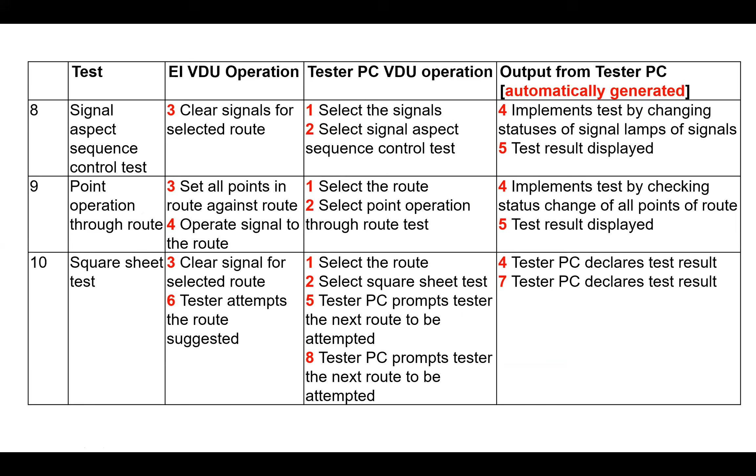It saves at least 50% time.

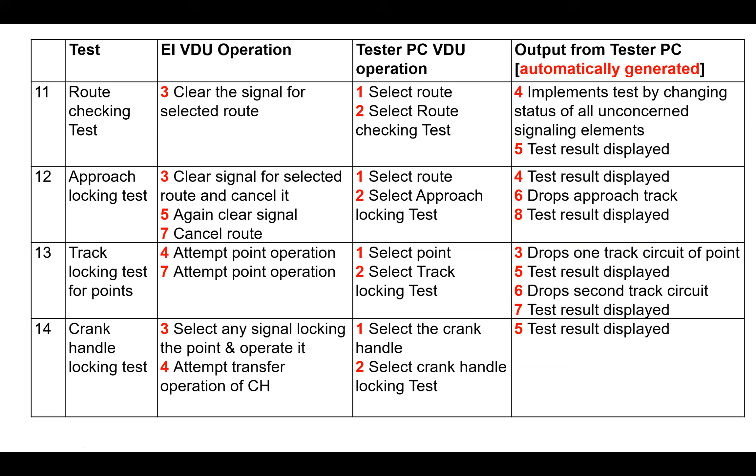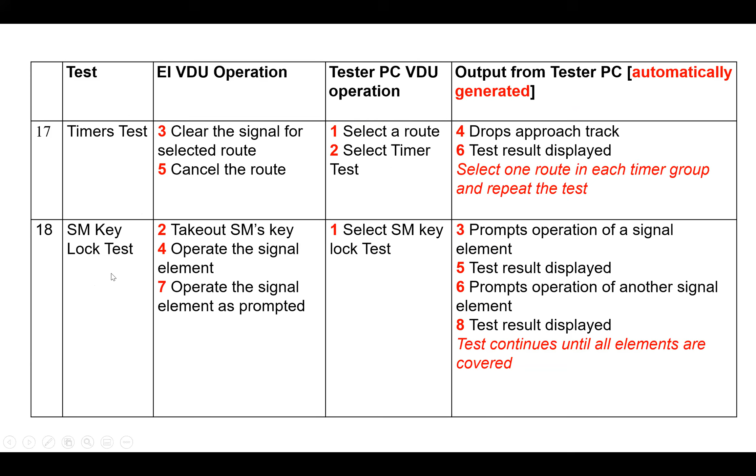So LC gate locking, route locking test, these are all the clear instructions how they are supposed to be done. Timer test, SM key lock test. So that is the end of the session.

I can take questions. Sure sir, not many questions. Just I'll take up the questions right now. Yeah, so.

How many hours does SIT take for a 50 route station to test? Is any person required to do the test after uploading required information to SIT?

The user, a tester, what he has to do is commence the test by starting it. Then once he starts, all tests are cascading one after the other, it happens actually.

But as the number of routes increase, the time taken will be very high. For example, let us take Vijayawada RRI, 754 routes. For one route test, it took 8 hours. One route test took 8 hours. So it is very high actually. Proportionately, complexity increases actually.